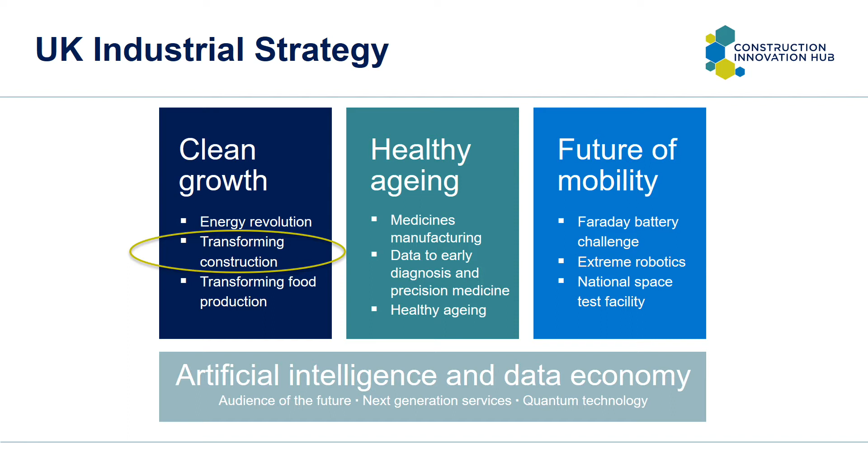So very briefly, the construction sector deal has funded 170 million in government funding, which is certainly from my perspective quite a game changer. This is the first time we've seen real investment from government in the sector, and also where the government wants to actually lead this.

Jamie mentioned the IPA consultation. I think that was a really good indication of the fact that the government is serious about this, and we're certainly taking it very seriously.

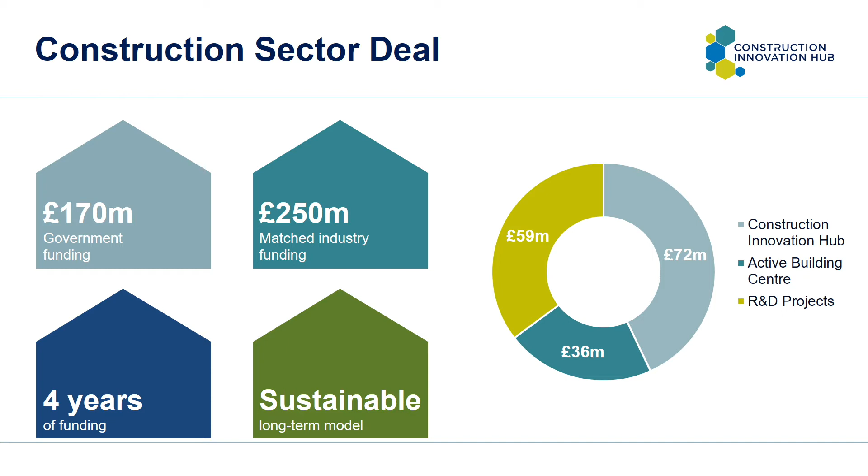The Construction Innovation Hub has £72 million for a 4-year program. As was mentioned, that's a collection of very nicely matched businesses. We have the Building Research Establishment, the Manufacturing Technology Centre, which Mark will represent, and the Centre for Digital Built Britain.

So down to really why, a little bit before the guys talk about what we're actually going to do, the Construction Innovation Hub is structured into 4 key themes, and I'll take them in a slightly different order so I can get my point across. We're interested in value - working with government to drive value-based procurement and value-driven, outcome-driven decision-making in construction. It's very important, and it's got a huge amount of momentum right now.

We're also interested in assurance and where assurance needs to go in the future. In the context of what we're talking about today, that's quite varied - from kits of parts that have been properly certified and checked, with every interface tested and working together properly, but it's also post-Hackitt, where is the future of building regulations and how might that drive a more manufactured approach to construction, which I think is quite interesting.

And then we have digital. We all know, I don't need to say anything about the fact that digital is upon us and it changes everything we do, and Adam will talk a little bit about how we're looking at that.

But the reason I wanted to talk about those 3 things is that our hypothesis, as the hub, is that over the next 10 years particularly, and accelerating beyond, manufactured construction is going to be the way forward and the way to deliver better value, digital approaches, and certainly better assurance.

So I wanted to talk about that because I think it's interesting to understand that we're doing a lot of work around platform, and you'll see that, but actually unless we start to drive the right kind of behaviours, unless we start to drive digital approaches, manufacturing won't get the kind of airtime that it needs.

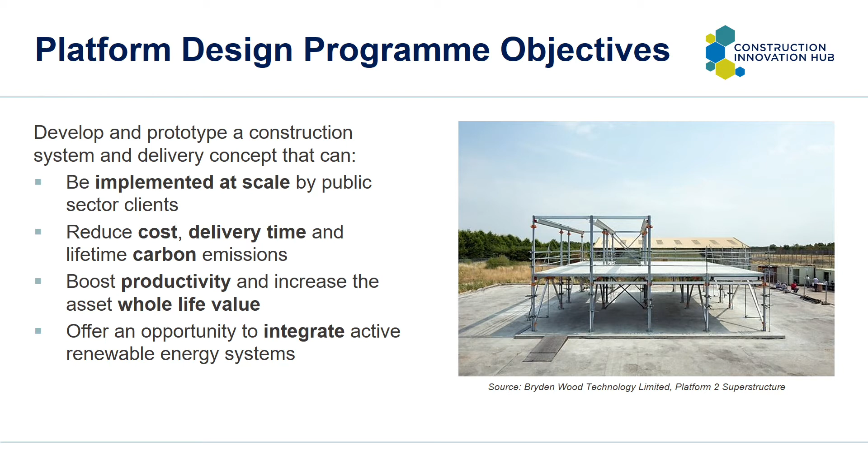When we kicked off this platform component set programme, one of the things I always want to draw us back to is what we promised we would do at the outset. When the programme was initiated, we promised that we would be implementing at scale a solution for our public sector clients. We said we would be looking at reducing cost, delivery time and carbon emissions, and we said we'd also look at productivity and whole life value. And we wanted the opportunity to integrate some of the skills and capabilities from other partners funded by Innovate UK, specifically Active Building Centre, which takes us to the bottom bullet point - making sure we integrate renewable and energy systems into a whole system rather than as components added afterwards.

Now, my role is as a manufacturing engineer. I have a biased view of the world - a whole 20 years worth of university experience, graduate training, and then working as a manufacturing engineer. My view of the world is very process focused. If someone is designing something, I need to know how I'm going to make it, such that when they've designed it, I know exactly all the steps that are going to go into its manufacture.

My experience of the construction sector is it is very product focused. We design buildings and then we work out how we're going to make them. That means every product ends up being manufactured, constructed, or assembled in a different way, depending on your terminology. We establish how we're going to make it once we've designed it. We may have some good design for manufacture and assembly, but you're still fundamentally designing a building and then working out how you're going to make it. That means you're very reliant on the skilled trades and crafts and the people who are going to make it happen, and your quality is very dependent on the people who do it.

You also end up with this transient workforce that builds it and then moves on. I say to some of these guys, can you imagine if the paint shop at Jaguar Land Rover or the interior shop was run by a different group of people on every single car they made, and hoping to get the same quality in every vehicle? As a manufacturing engineer, it just doesn't quite feel right.

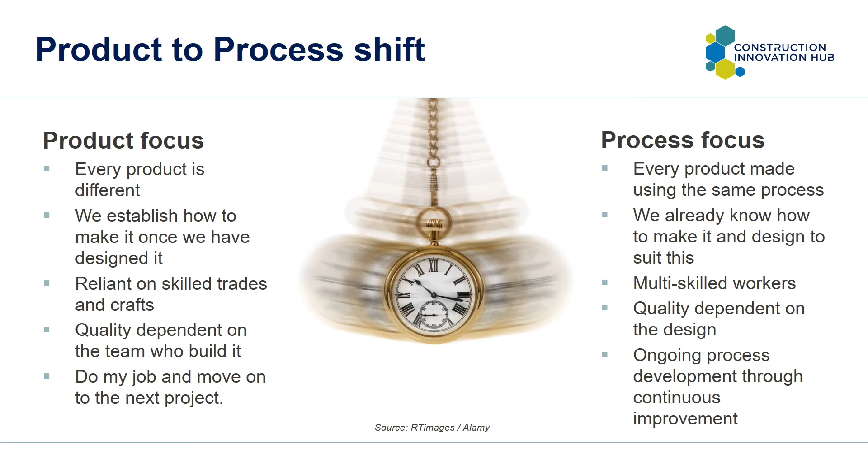Now, to try and make this happen on the Construction Innovation Hub, we've had to think very differently about the roles of the people in the team. As Keith said yesterday, our job is to facilitate industry, not to do this for industry. To do that, we've come up with these terms, these roles, and they are different to the way the industry currently operates.

So the top level role here is integrator, and the role of integrator is very much an assembly organisation. Integrators pull together standard sub-assemblies, configure them to meet a set of needs, assemble them hopefully with their own team and specialist equipment, and once a building is finished, they warrant and assure the performance of that building through its life.

Now, the reason for this change - I can give you an example. If you look at something like the Boeing 737 MAX failures that happened last year, the first person everybody pointed to was Boeing. Whereas in the construction sector, we haven't got that same accountability or obviousness of accountability that we have from other manufacturing sectors. What we're trying to achieve with the integrator role is this same accountability on those people who assemble these buildings - they don't contract it out, basically.

Now, the sub-assembly one role are the companies that make the sub-assemblies that the integrators are going to use. We had in a previous presentation from HTA the example of engines, so sub-assembly one organisations make the engines that integrators integrate into their buildings. What that means is we can effectively have competition between different sub-assembly one organisations. So if we were looking at something like a building structural frame, the integrator shouldn't really mind whether it comes from company A, B or C, as long as they all perform the same job - the measure of value can be applied to those three solutions.

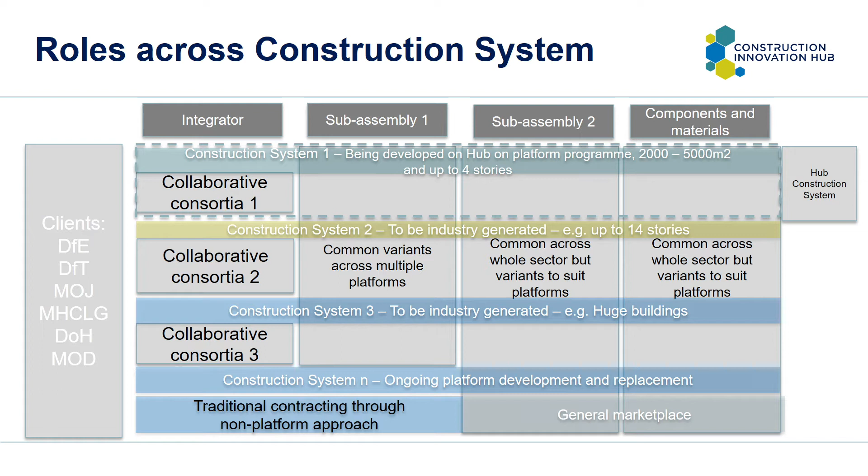I've talked about the Subassembly 1 organisations, and what we've done is worked with the companies coming in as integrators to look at standard sub-assemblies those integrators can use. We've managed to come up with 13 predefined sub-assemblies, which will be the 13 that everybody configures and buys from. We want standard specifications and interfaces to allow our Subassembly 1 organisations to compete on all 13 of these sub-assemblies.

That ranges from foundation systems, ground floors, cores, risers, plant rooms, ceiling cassettes—the whole suite of bits you need to build a building. Over the last year we've been engaging with industry, working out who wants to come and collaborate together, even though they may be potential competition in the future.

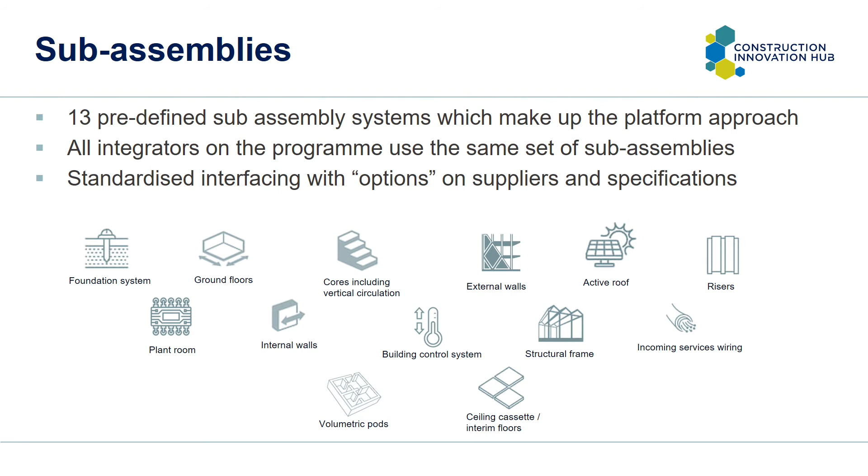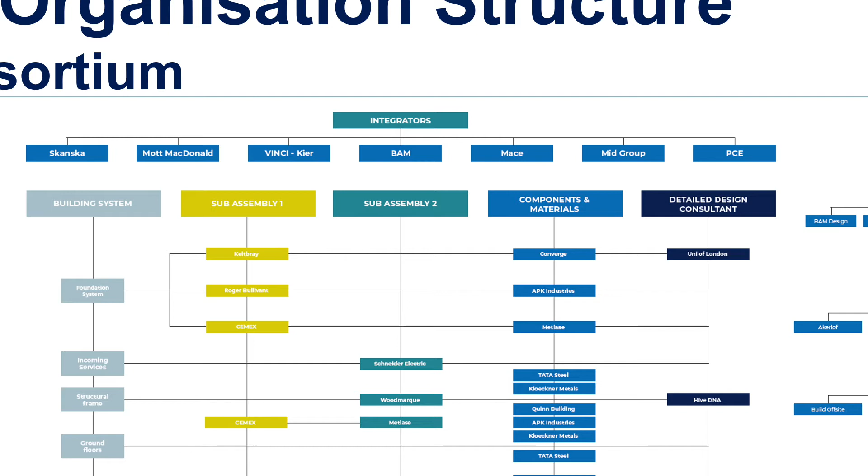Our integrators across the top have all been interviewed for the role. We've made sure they're doing this for the right reason—they're all prepared to collaborate and understand the benefits of collaboration. I'm really proud to say we've got Skanska, Mott MacDonald, a joint venture between VINCI - Kier, BAM, Mace, a great startup called Mid Group, and another small company called PCE. They are the 7 companies who can work together to be this integrator of the future.

You can see down this left-hand side of the chart all the different 13 systems I talked about—foundation systems, structural frame, everything else. You can see these yellow boxes are the Subassembly 1 organisations who are going to be making these components. And we're seeing some really nice examples.

This bit is all about foundation systems, this bit at the top. We have Keltbray, Roger Bullivant, and Cemex all saying they want to be Subassembly 1 organisations. In the future they all want to compete with each other, but they want a standard way that a system can work which allows them to compete on a level playing field, doing it the same way every time.

So for people who want to see more information about this, come and speak to us at the Construction Innovation Hub. We're really proud of the 40 odd organisations who've joined us in this collaborative effort.

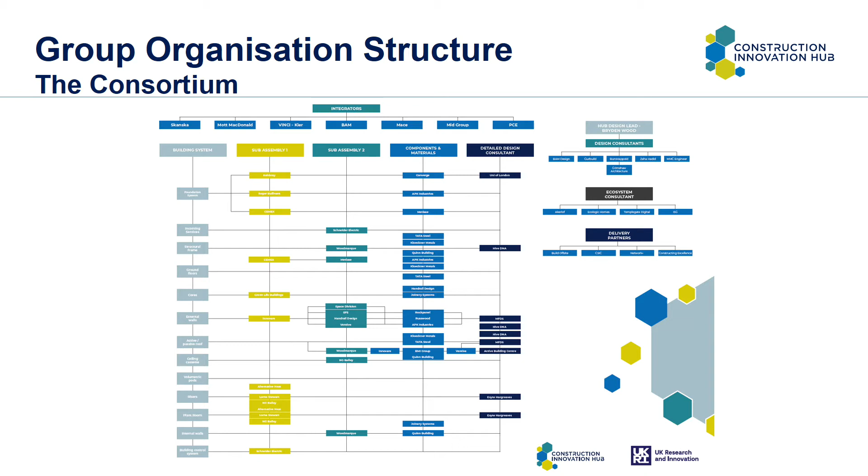Yesterday Keith was saying that our job is to transform the sector, and part of that is helping these companies to collaborate together. Another part we're really passionate about is skills and changing the skill set that the industry currently has.

To do that, we've come up with what I term an equivalent of a manufacturing engineering degree for construction organisations. For those 40 companies who are part of the platform programme, we're going to take them through very specific training on some of the tools that will embed a process-driven approach.

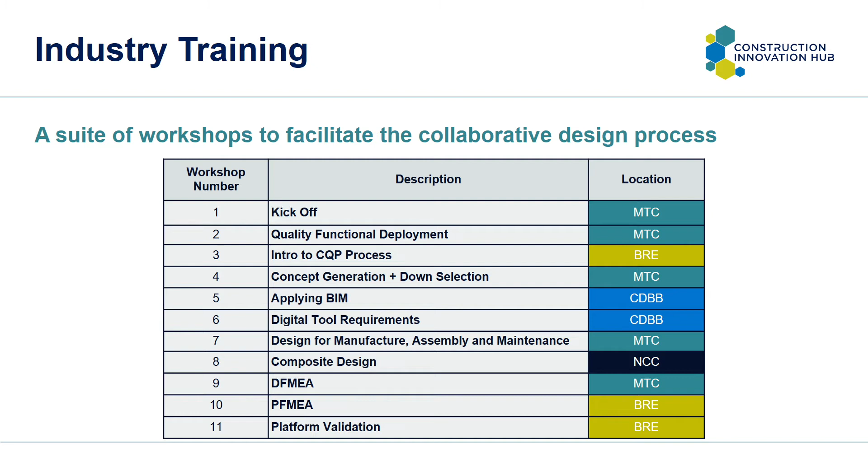This will establish a process-driven and manufacturing view for the construction sector. That training isn't just being delivered by the MTC, BRE or CDBB, who are the Construction Innovation Hub partners. We're also working with other companies like the National Composite Centre, who have real skills and capability in composites that they can bring to the programme.

The last thing from me is talking about how fast-paced this programme is. These are the major gates we've got to hit over the next two and a bit years. We need to have come up with a specification for this platform system for buildings 2,000 to 5,000 square metres by the middle of this year.

We then need to have done our preliminary design and had design approval by the end of the year, and that allows us to do all of our designs, methods, manufacturing and prototyping by January 2022. What we're then hoping to do is demonstrate, validate and test all of these components through a series of work across MTC, BRE and CDBB, assessing that design physically, digitally and at full scale, allowing us to test interfaces, sub-assemblies and ultimately a whole building level.

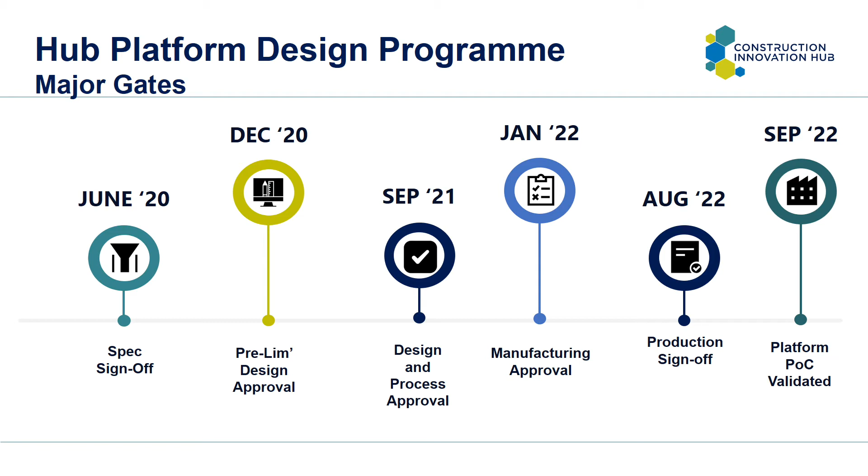So I'm going to hand over to Adam, who's going to talk a bit about how we're going to do some of that digital work.

Between the two, we have a layer of digitized standards and so on that enable the communication between them. The central portion is defined by its interoperability standards and functional specifications. The digitization will involve digitization of component libraries, product data and asset data, looking at digital specifications and standards.

The suite of tools will encompass possibly quite a large range. We envisage a design configurator which will be used to put buildings together, whole life performance evaluation, digital compliance checking and so on, leading up to the development of digital twins that can be used for asset management through life.

Some key enablers feed into this, which we're pursuing within the hub. We're looking at producing consolidated requirements that we use to define our platform approach. We have a value and assurance stream, or framework, within the hub that will help us assess testing and how we manage value. Digital tools should enable us to define an information management framework which will underpin a lot of this activity, help define commercial models to enable the approach, and ensure supply chain readiness.

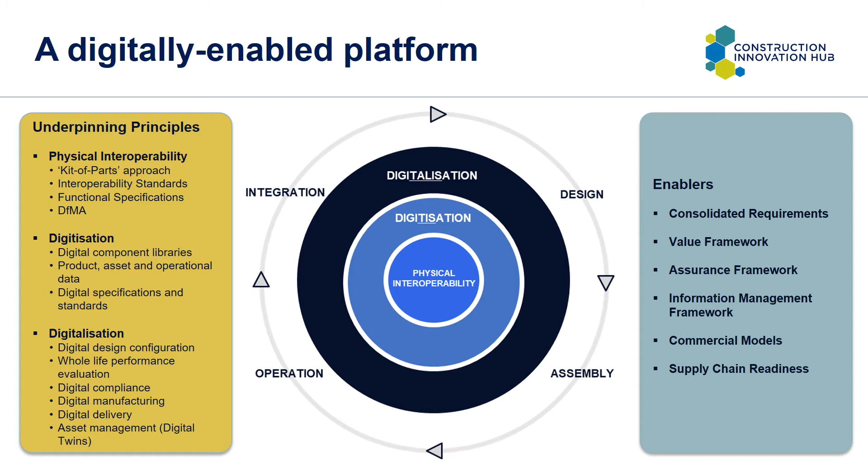This suite of tools opens out to form a workflow, and an example workflow we can go through here, which is not exhaustive. We imagine as we work with industry we will build on this even more.

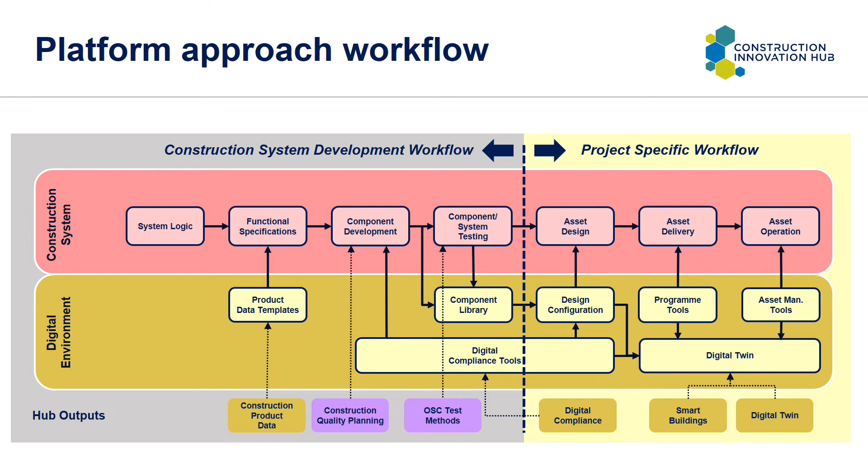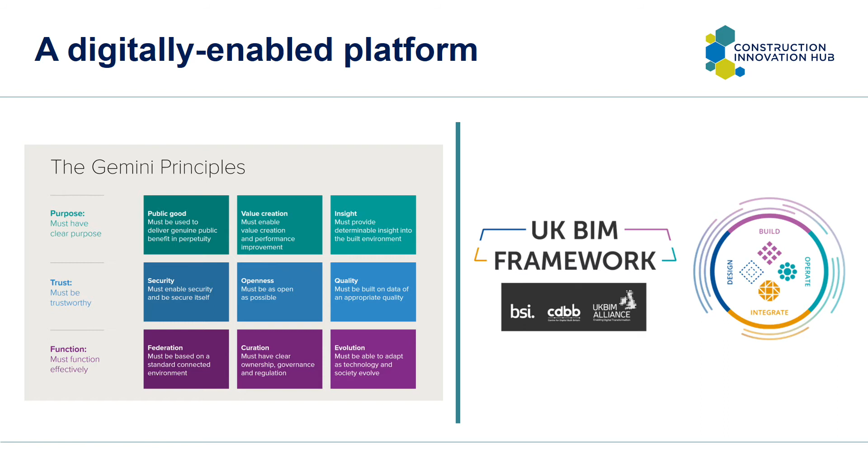We'll do this by building on work that is ongoing within the hub already. We'll make sure that we are compliant with the Gemini principles that have come out of the hub, and we will use tools and practices being developed within the UK BIM framework. We will continue to build these with our industrial partners to ensure that tools being developed are done with common requirements, interoperability as standard.

Hi, I'm Jamie Cresser-Brown. I'm an architect and director of creative technologies at Bryden Wood.

So today we've heard quite a lot about physical platforms, and what I wanted to do was talk about physical platforms and how that links to digital platforms.

There's a lot of general skepticism and paranoia about automation and the impact this has on the built environment, and particularly people's jobs. Here's some extracts of articles released recently about automation: how at risk is your job from automation? The robots are definitely coming, and will make the world a more unequal place. The rise of artificial intelligence means architects are doomed.

I did a job search at the weekend just to see what would come up if I typed in 'automation architect.' There were only about 1,000 results, which is about 1 in 20 of what comes up if you type in 'architects.' So are we all really doomed?

It seems unlikely that architects are about to be directly replaced by robots, but the role of the designer is definitely changing. We as designers need to embrace that change and not fear it. We need to let our computational ability supercharge our design processes and allow us to design faster and smarter than ever before. The greatest benefits will come when we embed our knowledge into the design process, enabling us to work not only faster, but also smarter.

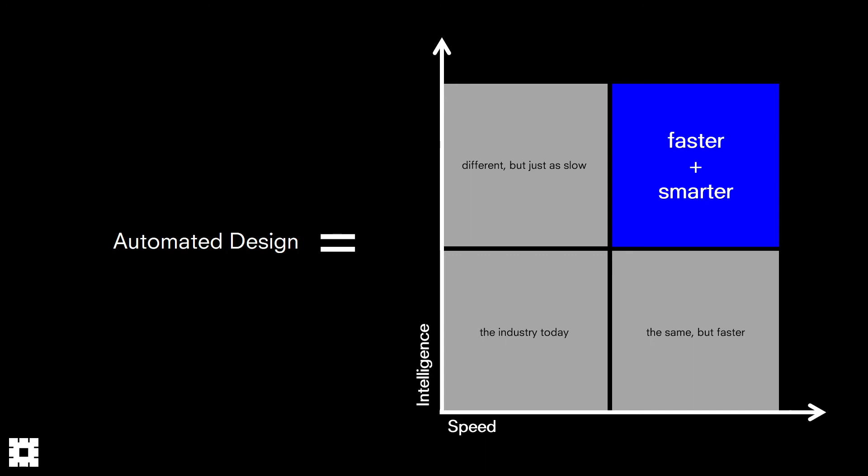So how can we design for automation? The answer to this is rules. We need to articulate design as a series of rules - first of all, spatial rules.

As we saw previously, certain typologies lend themselves very directly to spatial design rules, such as schools. There's a very strict, rigid schedule of accommodation for designing schools that clearly sets out room areas, adjacencies, dependencies, those kinds of things. So if we can start to understand our spatial requirements in terms of rules, that's one step.

Secondly, manufacturing rules - rules governing the way we construct our buildings. And that's exactly what platforms is, as an approach to construction. Platforms involve manufactured solutions that are a set of components that go together in predefined ways. They're pre-engineered, and put together using productive processes, which enables us to be really familiar with the construction process.

So the greatest benefits can come if we simultaneously design for manufacture and design for automation. This is linking physical platforms and digital platforms together.

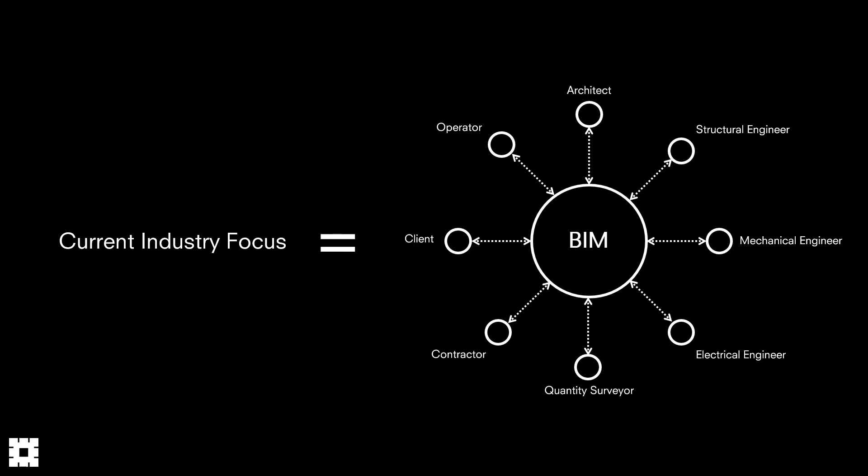Current industry focus has a lot of emphasis on BIM, sitting at the center of our processes, often seen as the cornerstone to design. But an automated approach should no longer place BIM in the center of the process. BIM is simply an output with data sat at the core - data which can be represented in many different ways, dependent on what it's being used for.

So this week at FutureBuild, we've been demoing our new automated design workflow for housing. It's called Prism to Platforms. I'm sure many of you are aware of our open source web app that we released about a year ago with Cast and the Mayor of London to accelerate the design of precision manufacturing for London. What we've done is taken that initial piece of work and developed an automated workflow that supercharges the design process to get you to a full platform BIM model of your housing design in a matter of minutes.

We're able to do this because we understand the rules behind the platform system. Here we're using Platform 2, the system suitable for mid-span buildings. We've got a similar system for smaller span buildings and larger span buildings for offices, etc. So we're using Platform 2.

I'm going to play a video that demonstrates the workflow from end to end. It goes quite quickly - it fast rewinds the process at the beginning, and I'll just talk slightly over the top of the video.

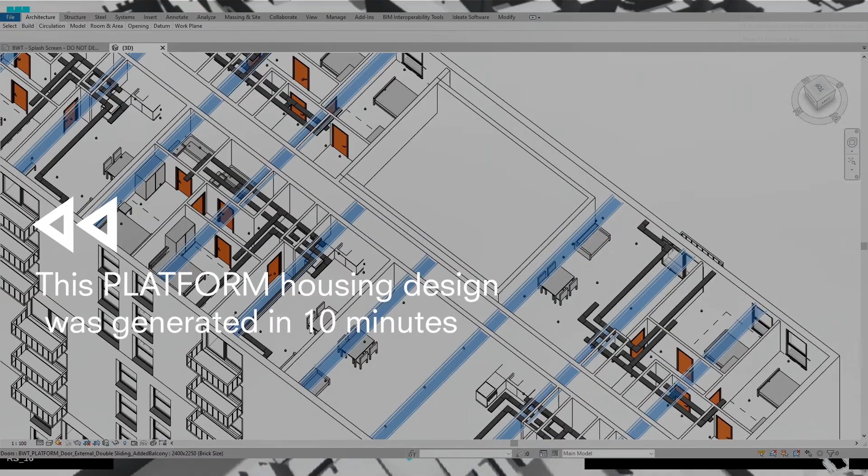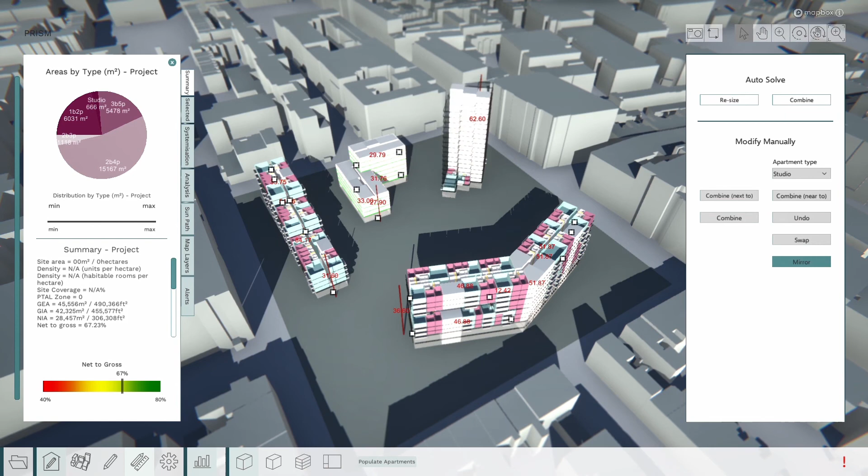So as I said initially, this process starts from Prism, our open source web app that we released last year. Here you're setting your user brief for your specific design scheme, setting your floor-to-floor heights, your unit mix, your key dimensional requirements, and then you save your configuration file.

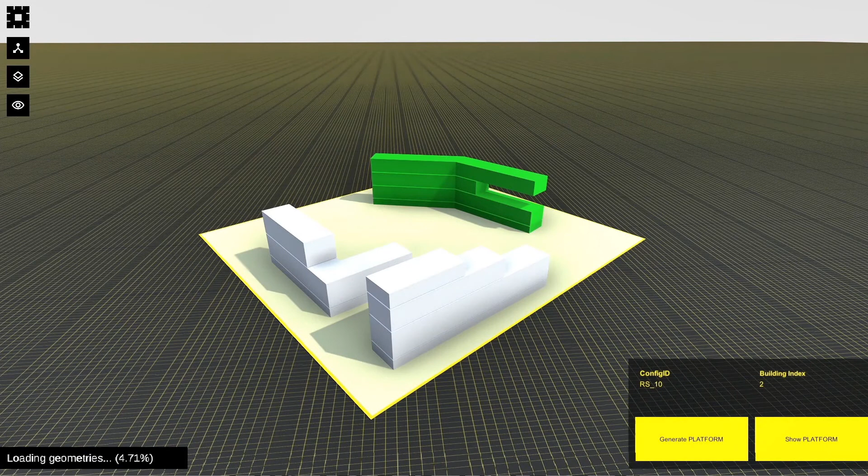In this instance, we're saving to a database. We're then loading this into a front-end application that's running and generating the platform solution based on our physical platform rules in Grasshopper. So this is a data model. That data model contains all of the data points of the beams, columns, walls, doors, sockets, lights, based on the configuration that you've done in Prism.

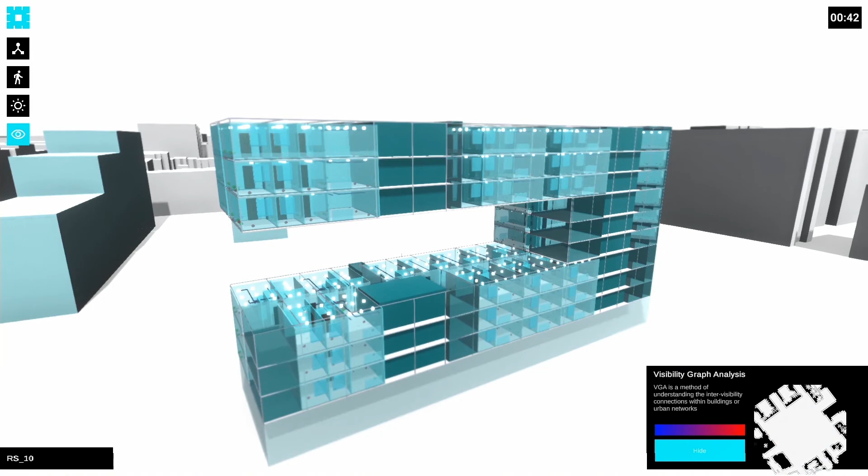We're then simulating that design to interrogate our design decisions in another web app. And from there, we're exporting that data-rich model into BIM and populating that with our physical platform components. That's when we're generating the geometry of our building.

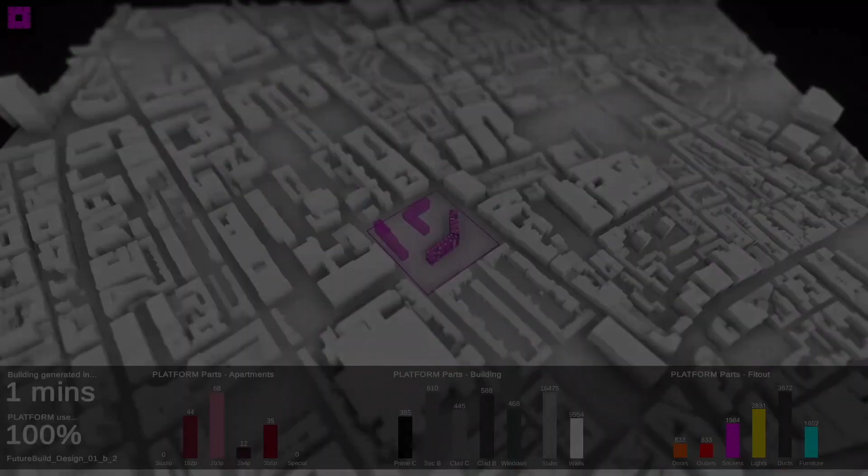The data model that was produced in Grasshopper is a series of lines and points representative of where all of the platform parts need to go. You can get full quantification of your design in terms of numbers of parts at that point. You don't need to get to a fully designed BIM model. That can be an optional output. And because you can do this so quickly and assess and simulate against your design so quickly, it enables you to explore more options in less time.

So the image in the background, that is our data model, the points and the lines all being representative of different kinds of platform parts. So you can see along the bottom, everything is fully quantified at this stage. It takes a matter of minutes to get to this.

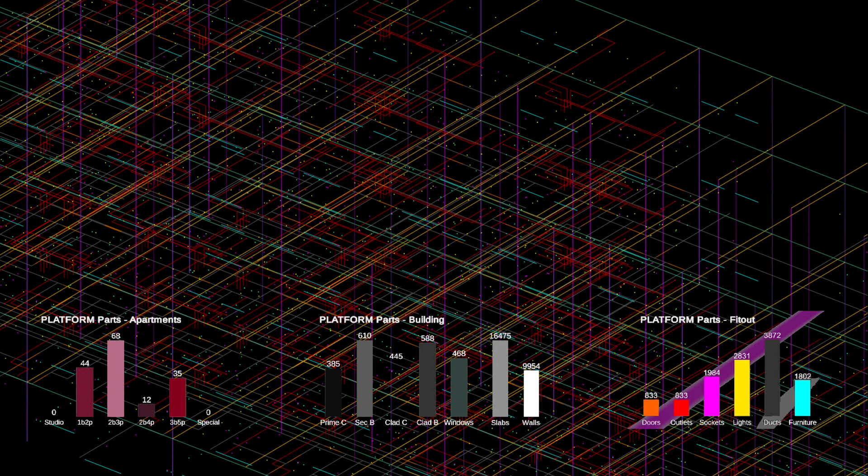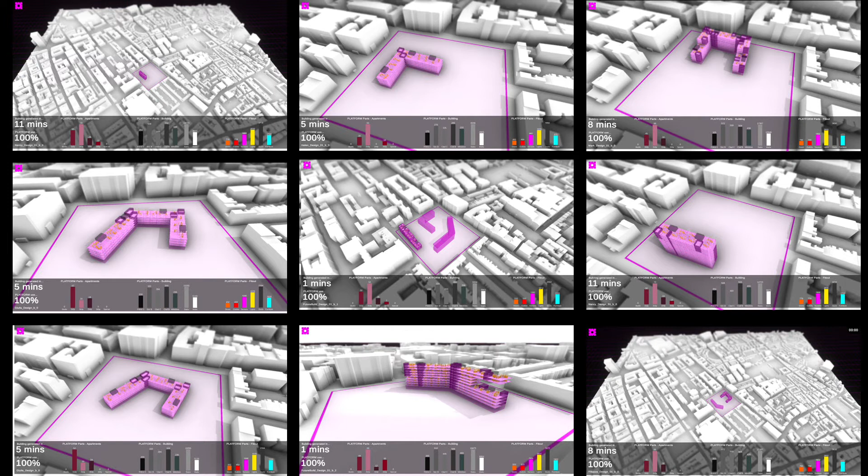And we've been demoing this on our stand for the past 3 days, and here are some of the designs that have been produced by willing participants. All of these you can see on the bottom left-hand side, there's a timestamp against those. This is an indication of how long that platform building took to generate using our workflow. And that ranges from about 1 to 11 minutes.

It takes longer to generate the geometry just because the Autodesk software side of the workflow is a little bit slower. If you're interested to learn a bit more, then we're still demoing over on our stand C70. It's got bright pink carpet, so you can't miss it.

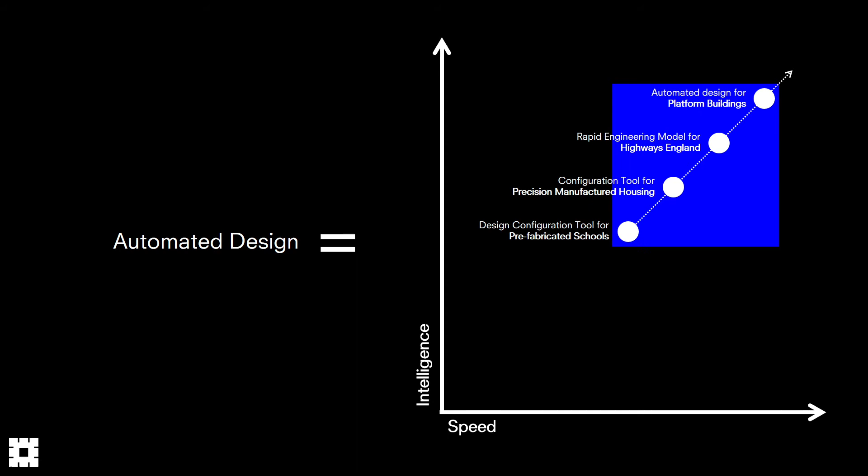So automated design, we are working on this for a number of different clients and different typologies. We've done, as you saw earlier, and as Jim played, a similar configuration tool for schools. We've obviously released the open source web app Prism for designing housing, but we're also doing similar automated design workflows for rail and for roads.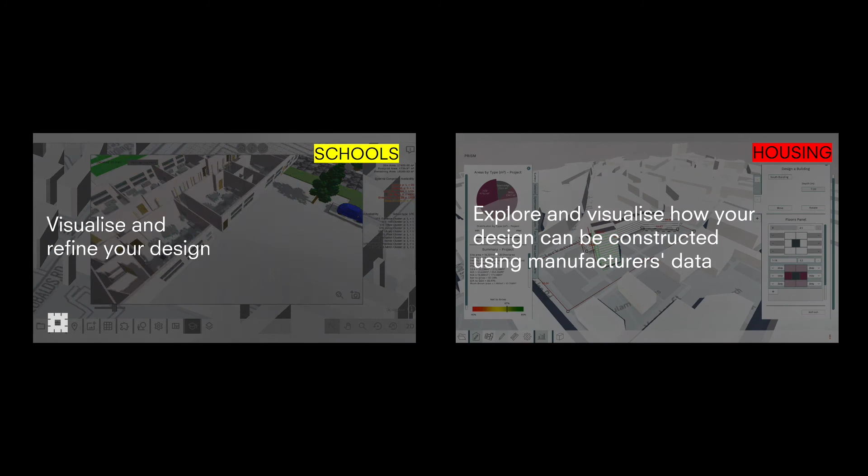So here's some little video clips. These two are open source. Is this going to play?

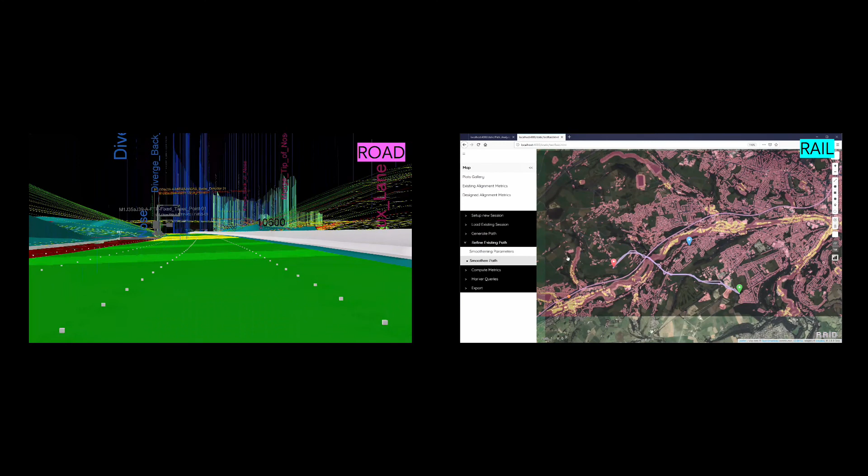And this is some of the work that we've done for Highways England and also Network Rail. I think we're all architects, but we're still able to get involved into different sectors because of our different approach and the way we think about automation.

I also wanted to just give you a little update on Prism. We're about to relaunch this in about 3 to 4 weeks' time, I think the end of March, and this is a little sneak preview of the new interface. One of the things that will be in this next release is platforms as an option for learning about whether your system is suitable for being manufactured by that particular system.

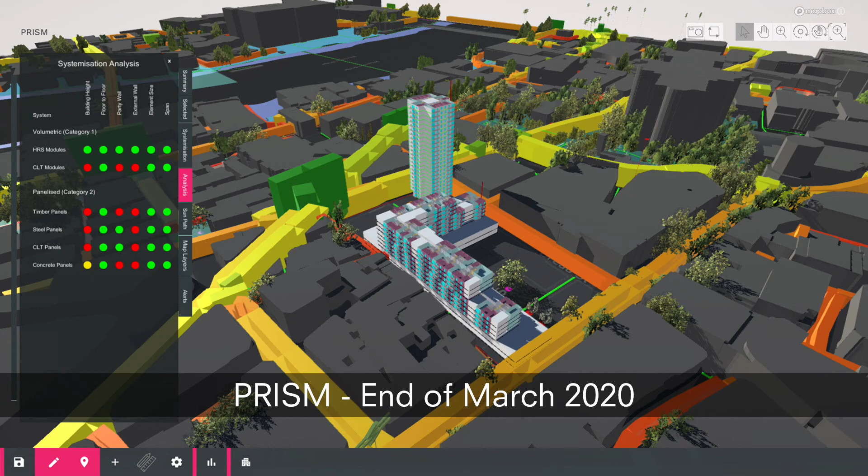That's it. Thank you.

Thank you. So, yeah, some really interesting stuff there around generative and computational design, which I think gives us a glimpse into what is moving at pace certainly in the design fraternity.

So, by my reckoning, unless this man tells me otherwise, I think we've got about 25 minutes for questions and discussion. Have we got any microphones for the audience at all? There we go. So I guess I'll open it up to the floor. Has anyone got a particular question? Nigel, would you like to? If you can stand up, introduce yourself, please, and then I'll direct it to the panel.

Hello, Nigel Fraser from Build Offsite. Very interested in, I think it was one of Adam's slides where he had the processes on the right. I'm just keen on two things. One is that we learn from some of the things that have already been done. I know that at BAA some while ago, we used QFD and we did all those steps through to supplier readiness planning. So there's some lessons that have been learned from that I hope we can somehow feed in. But the other thing that we learned in that process was that the procurement process is incredibly important. And if you change the procurement strategy, then you can lose a lot of the benefits.